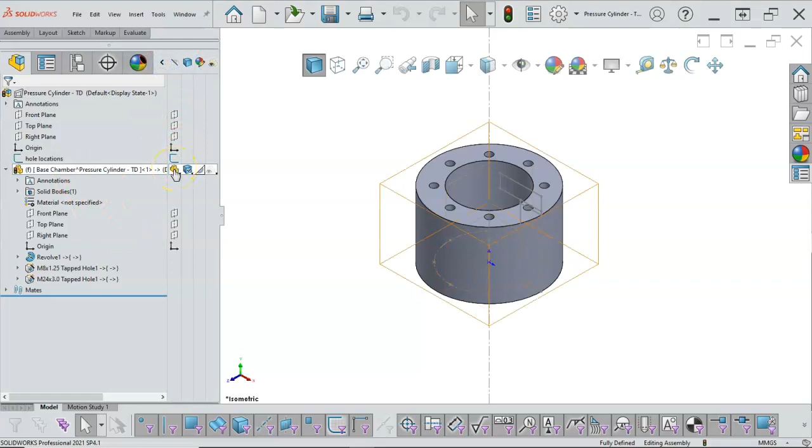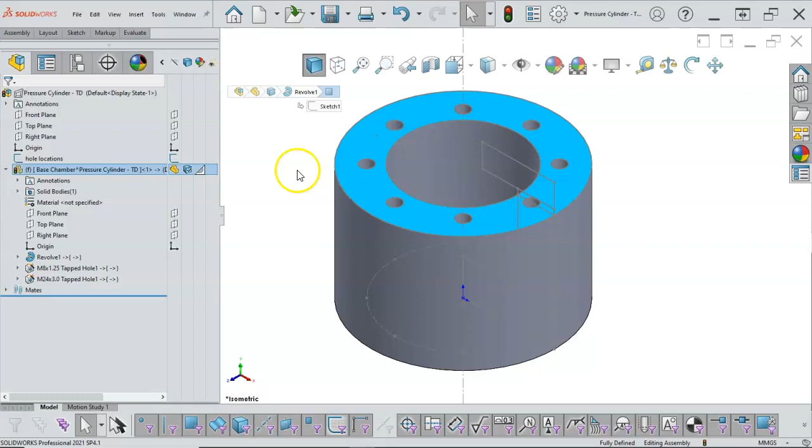I think I'll stay with the revolves. If we wanted to, we could offset a plane. I'll put out the warning that we could open up a sketch on this face and extrude up, but now we're tying the gasket to the base chamber. So if something changes on the base chamber or it gets deleted, we're a lot more prone to error than if we tie it directly to the single point of failure, the layout sketch, or our envelope sketch if we'd created one of those. So in managing the geometry, let's go ahead and collapse that back out.

Let's see what we can find, see if there's another way to get into that new component. If I go to the S key, we're going to do a new part. We could insert a new subassembly, but that gets a little complicated. I'm not real fond of doing a new assembly within the assembly. There are times where I find that this assembly really could use a couple of subassemblies, and then I would create the subassemblies and drag parts in. That also has issues with the mate reference, so you have to be careful with all of the things going on because it can get pretty sketchy pretty quick.

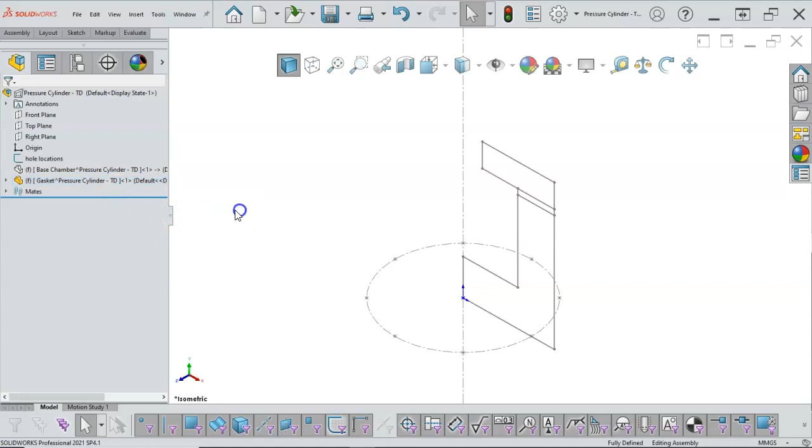I create the new part. We go ahead and escape, or I just click out into space. If we were to pick the front plane, for instance, it would automatically go in and be editing that part. I kind of like to do the rename and perform that little function before I get into the part.

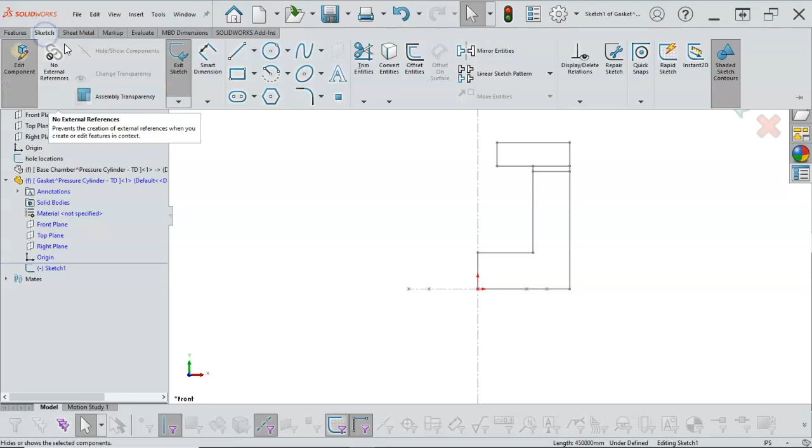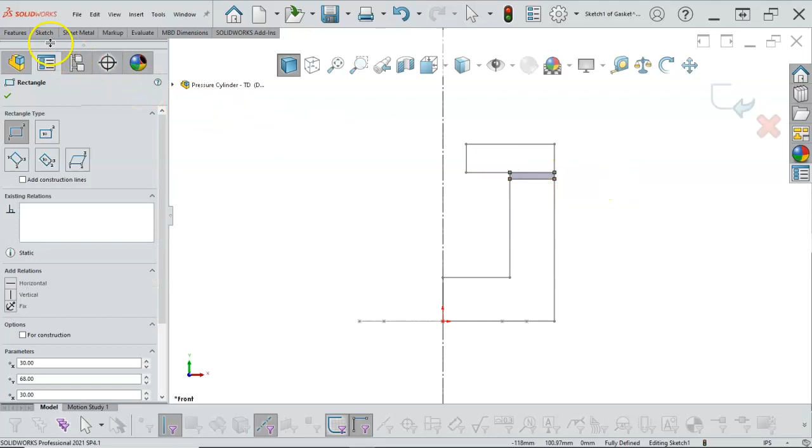So when I edit that part, we're going to again be sketching on the front plane. This time I will highlight the part. Last time we did the convert from the S key, so this time we'll go up to the command manager. Since that comes in as an object line, we'll switch it over to the construction line or center line. Pull the rectangle, go from corner to corner, and right into features to revolve, 360 degrees on the revolve.

One of the things is, as you get into this, if you look over and you don't see the blue, and you see that you're in a sketch at the assembly level, that becomes a little more complicated. So future sketches are going to appear lower because we start entering the features. There's not really a mechanism to put them back at the top if that's what we need.

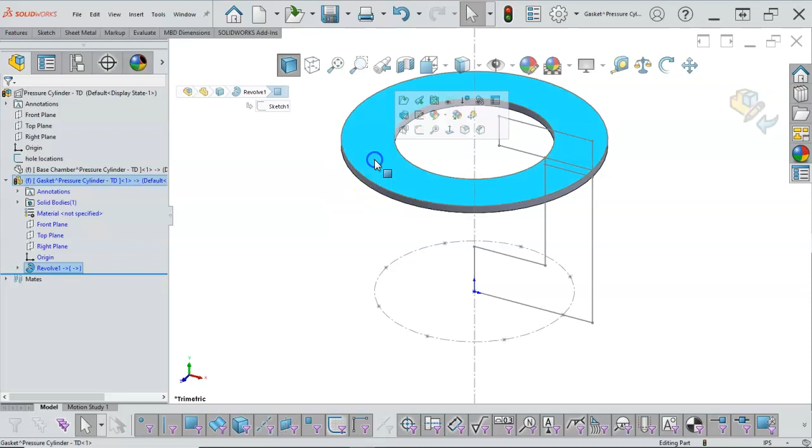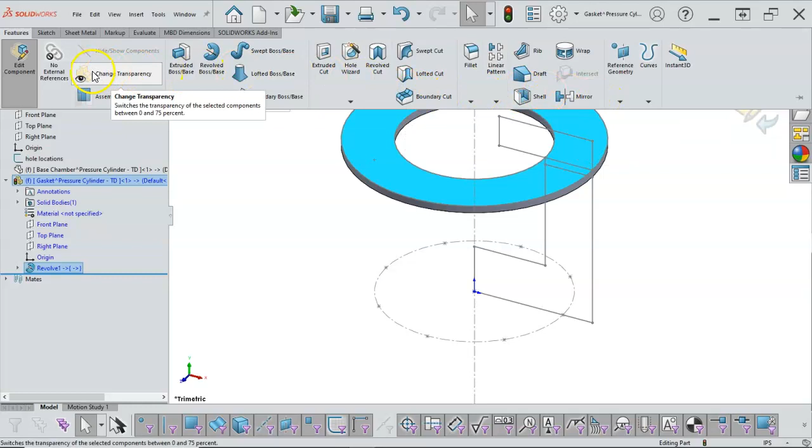All right, so in our sketch, let's go with the hole wizard. On this part, I am trying to go back to the command manager, so I don't... Now that I'm in the habit of doing the S key, I don't just do the S key. So we're looking for the hole wizard, and with the edit component, being inside of the assembly, everything shifted over a little bit, so I'm having to look for it.

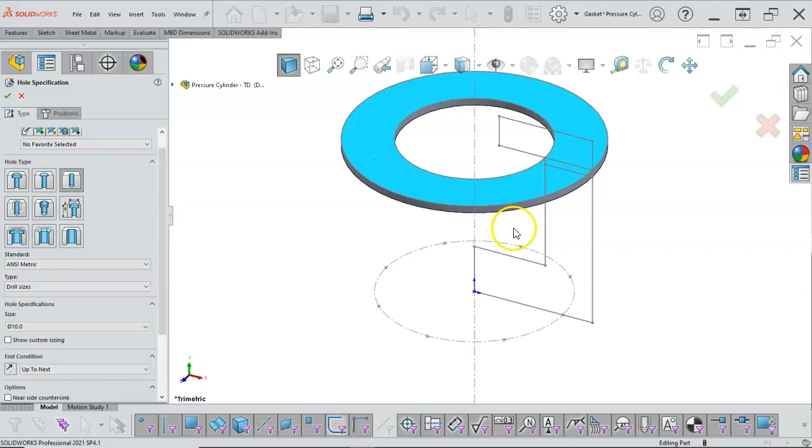All right, so this will be simple. I do not want the dowel holes, I would like to have just the drill sizes. Dowel holes give a little more tolerance for the geometry to be a press fit, a clearance fit for the pin. Since we're placing hex head screws in this, this one also came up inch pound second. So I'm going to have to look at my default files, and since I didn't do it on the other one, it's really not critical, because the millimeters is just confusing me a little bit. The millimeters are coming out of the assembly, and the size is showing up correct.

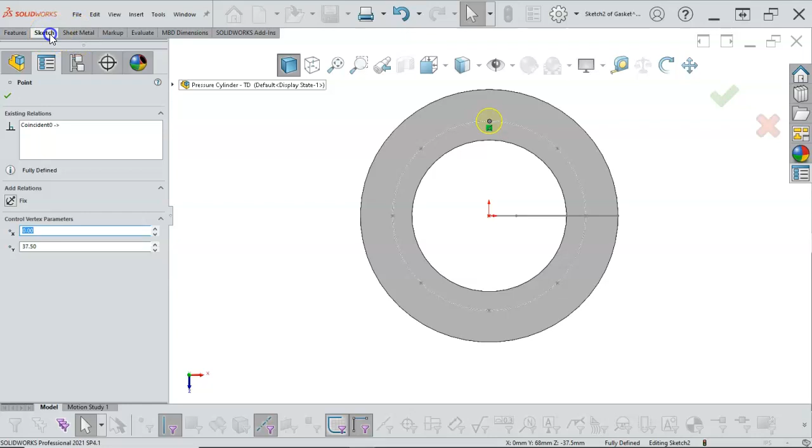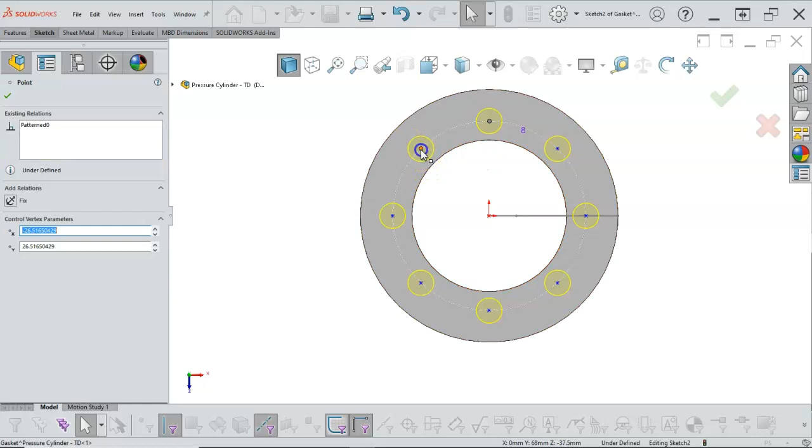So we did the sketch pattern previously, we'll go ahead and generate another one real quick. So the linear sketch pattern, we go to circular sketch pattern, total of 8, and then we go ahead and hit OK. There are times where dimensioning the radius and the angular spacing is nice. I would say tinker with those and pick up strategy, since that's going to a defined point, not really the coincident on the base circle, should define in one.

So there is our gasket, and then I click to exit the editing context, and we can rebuild and save, and we'll tell it to save all. And then this is the warning as we add these components: do you want to save internally? Eventually I'll get tired of seeing this and I'll say do not show again, because I'm in that process, and I will save externally when I am ready to.

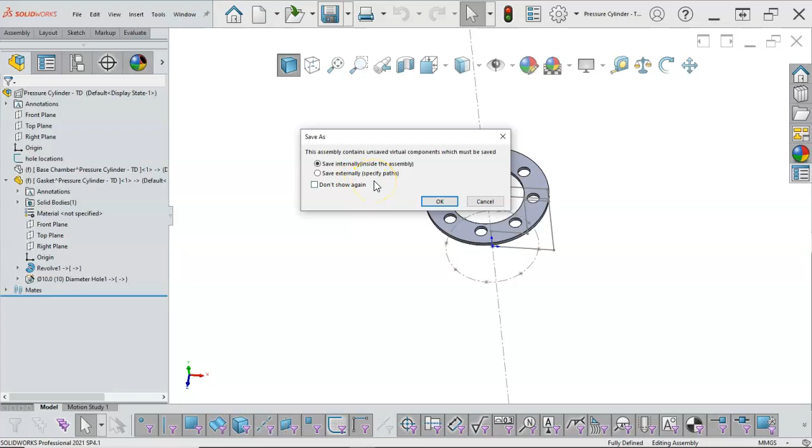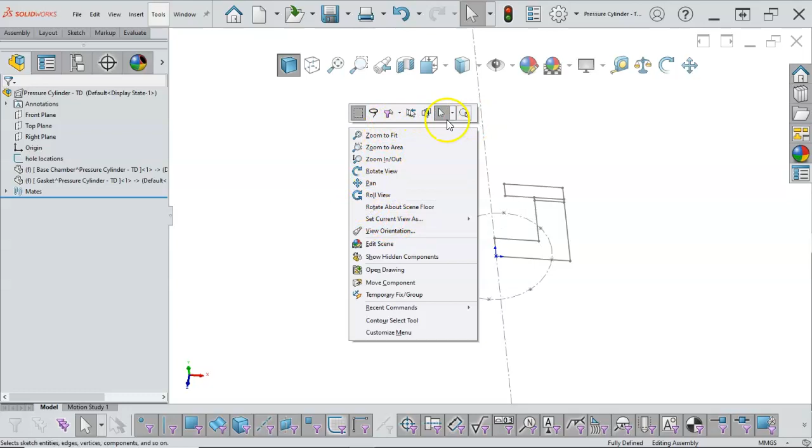So if we right click and we hide the virtual component, then we can move on to the last one. So let's see, we did the S key, we've been doing the insert. I don't think there's anything on the task pane. Let's see if we right click. Yeah, don't really have any tools, so we'll stay with the S key or insert component. Let's check the assembly pull down. There we go, new part.

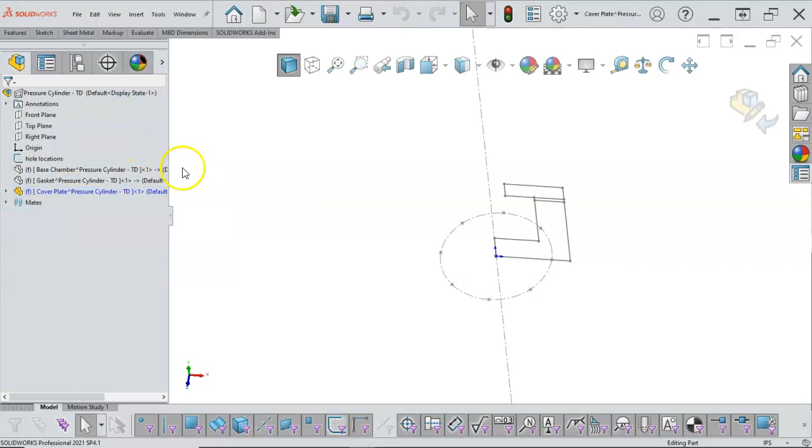And again, escape or click. And this is going to be the chamber cap cover plate. Realistically, you can call these whatever you want. All right, so the cover plate, we edit the part, we go into the front plane, open up the sketch, we'll go back into our rectangle, draw the body.

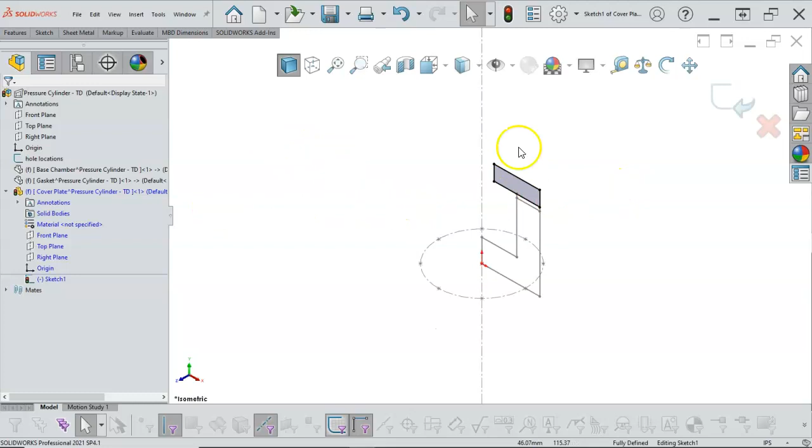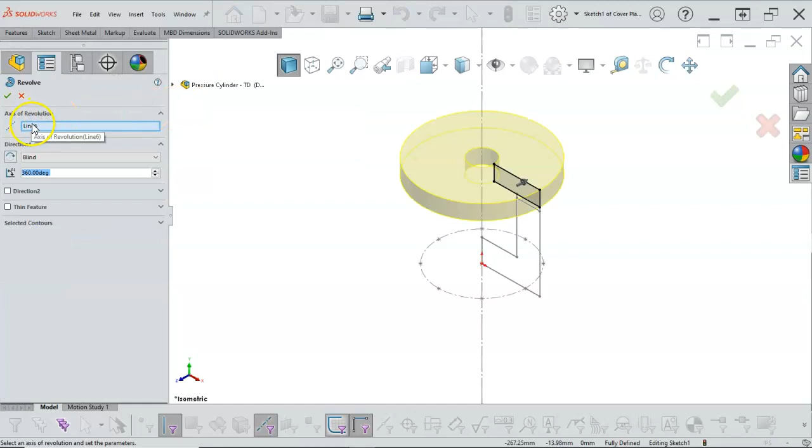We need something to revolve around, so we need to pick that. I think it picked anyway. We'll go back into the convert, make sure that it is a center line—we don't want it to participate. It might not bother, but it'll find the center lines where the object line we would have to select.

This time I generated the hole first with the model, so we're not going to do the hole wizard. Actually I wanted the hole locations to show, so we'll right click and hide the layout.

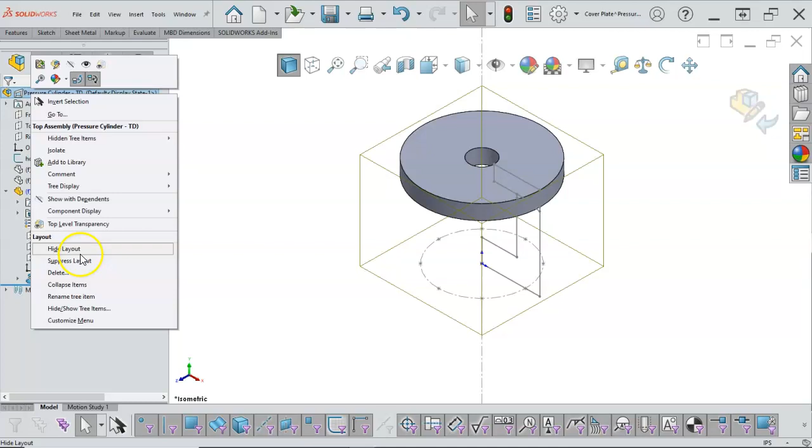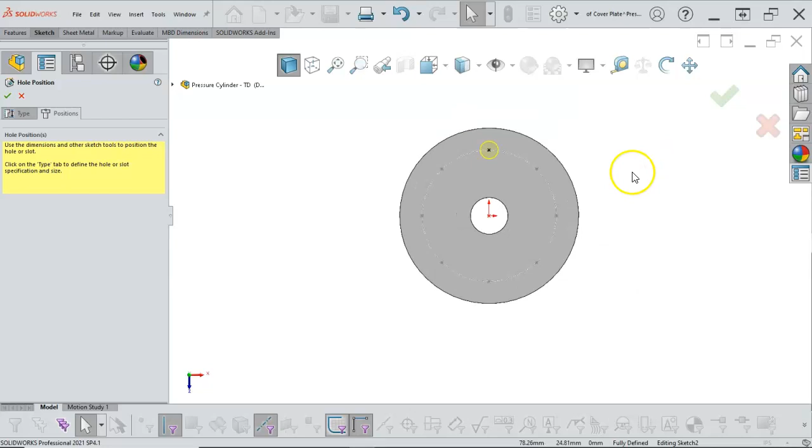For our feature, let's go into the S key this time for the hole wizard. We're still at 10 millimeters up to next, and I can do the position. This is pretty much a review of what we did in the multi-body, just to give you options.

There are times where it's nice to have it in the sketch, and other times where you get enough holes in the pattern that it's easier to make this a sketch-driven pattern. So if we go back to the features, under linear pattern, we'll find a circular pattern for the geometry.

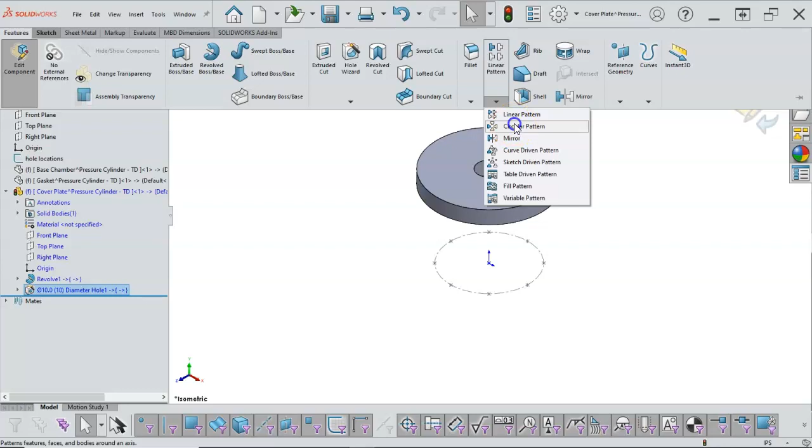Actually, that's what I should have done on the gasket, so let's just compare those two. For the circular pattern and direction, if we don't have something convenient like a cylinder, we can go up to the view and turn on temporary axes.

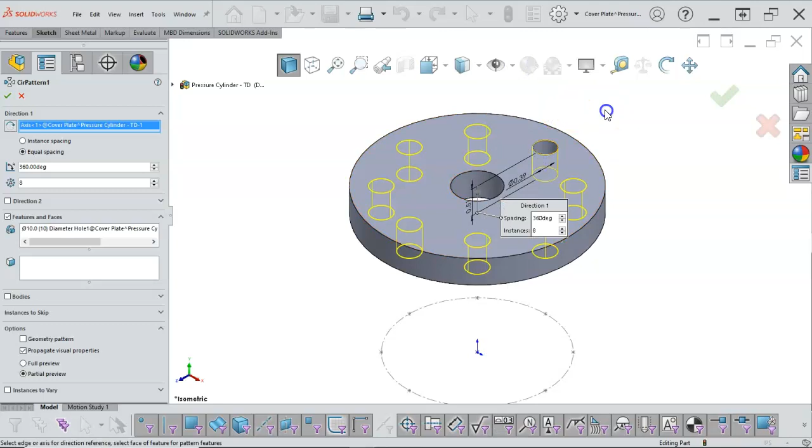I think last time we picked the cylinder. I can pick a temporary axis the same way, and then go back and turn it off, and that will work fine. If I suppress that out...

Pretty much the circular pattern is going to have the sketch pattern we did defined by the 8, where we're trying to make this point back to the hole locations, and this is related to the point.

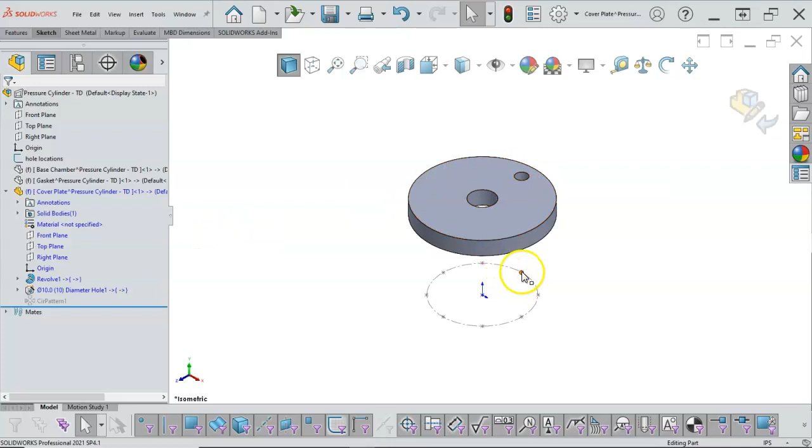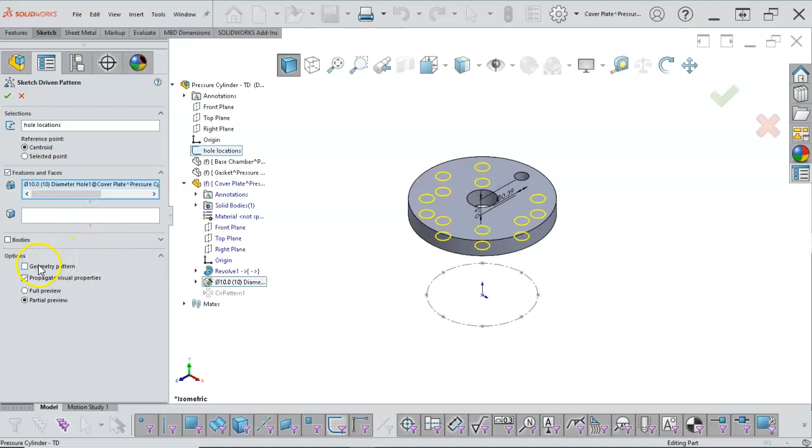So I pick the feature again as a pre-select, go into the sketch-driven pattern, and then the selection will expand out the flyout, and I should be able to find the hole locations. It generates the geometry, and occasionally it will have some issues where it'll recommend turning on the geometry pattern. We can try that—it's just a matter of how much it tries to solve or refine those geometries.

Now we need the cosmetic thread. We can go to insert annotations, and Cosmetic Thread. This is what the hole wizard is doing for us automatically. It finds that we are at 24 by 3, and we'll do the up to next condition.

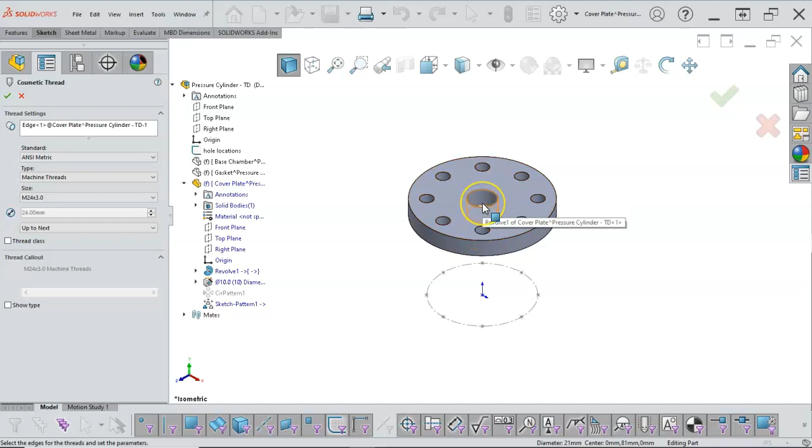So I'm still clicking on the outside going in. If something happened that I wanted to switch this over to a tapered or a different size, then we would have to go adjust this Cosmetic Thread manually, whereas the hole wizard would perform it automatically.

And then I decided I didn't really want to see the machine threads, so we'll uncheck the show type and go ahead and generate our geometry.

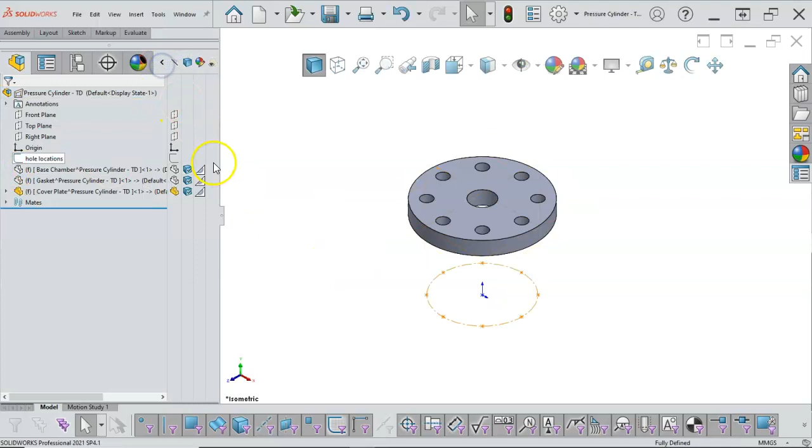All right, so up to this point, let's go ahead and hide the hole locations, and we'll expand out, and I can manage those geometries. Interesting, kind of got a video blip with the base.

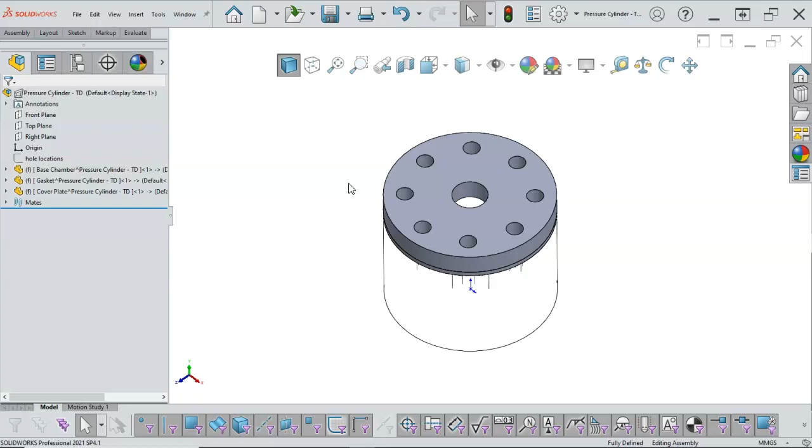At this point, we could go ahead and generate the toolbox and bring in the fasteners. I'm going to bypass that this time and go straight to the exploded view.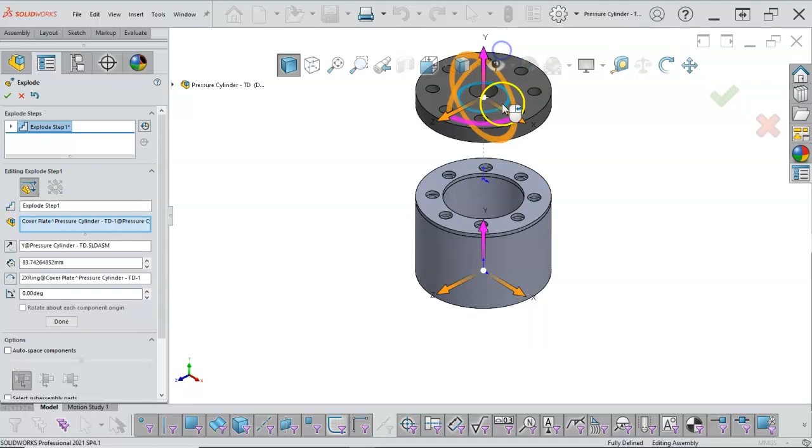So new exploded view, and I'll bring up the first part. Since we're in the assembly, this should go back to millimeters. We'll bring out the second one, and then of course if we had the hex bolts or washers or anything in there, we'd be able to perform that first.

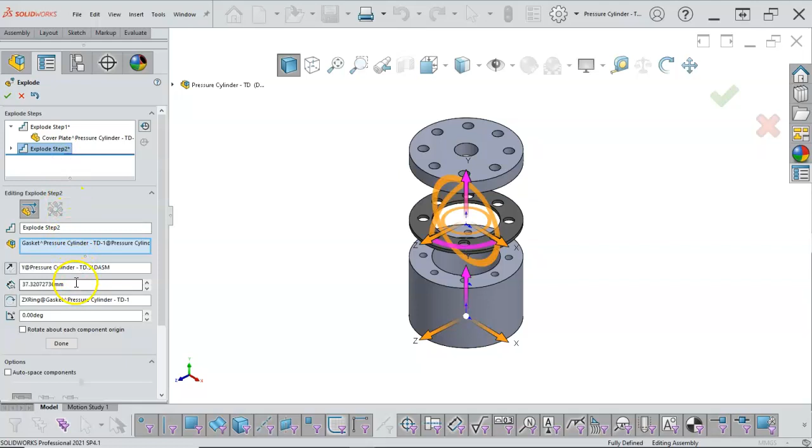So let's go 100 millimeters and make sure to hit done to apply it, and then maybe 40 millimeters looks pretty good, and apply it. So this geometry is applied directly in the assembly.

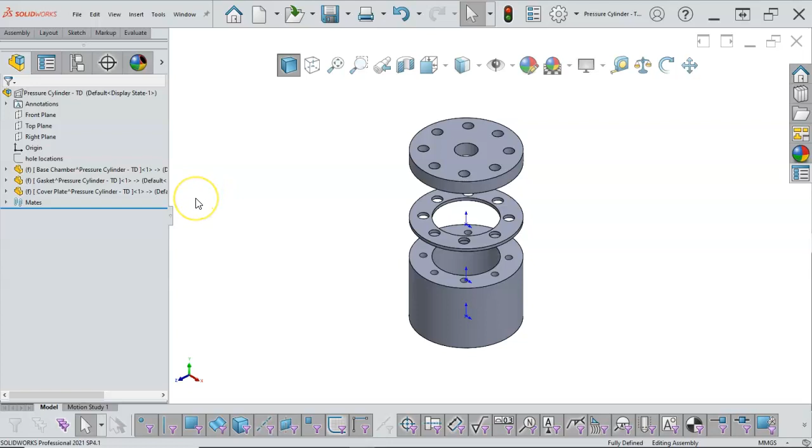All the parts are internal to the components, and the main thing is kind of like the multi-body. I could leave it at this stage and wouldn't really have to do anything else to this geometry if it was a single piece that we're trying to work with.

So let's collapse it, and we'll go back and just double click to make sure it gets saved. Save all, save internally, and I'd be interested in seeing how this reacts with the drawing.

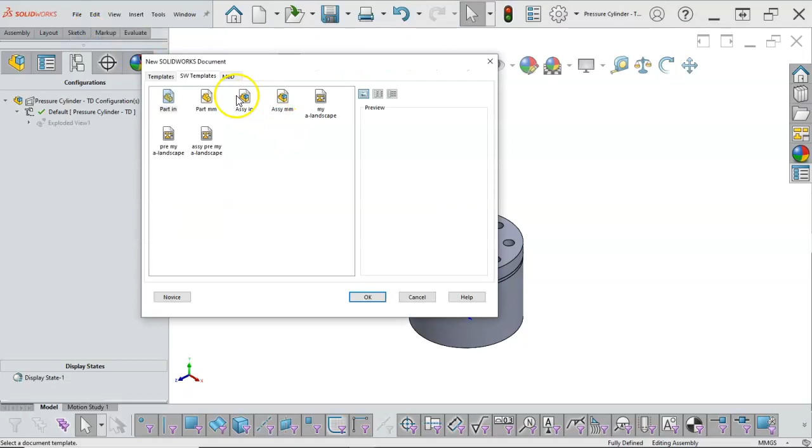So we'll do the new drawing, and I'll stay with my landscape, and we're looking for the open geometry. So there is my pressure cylinder top down. Let it update, and our first sheet we can do the exploded view.

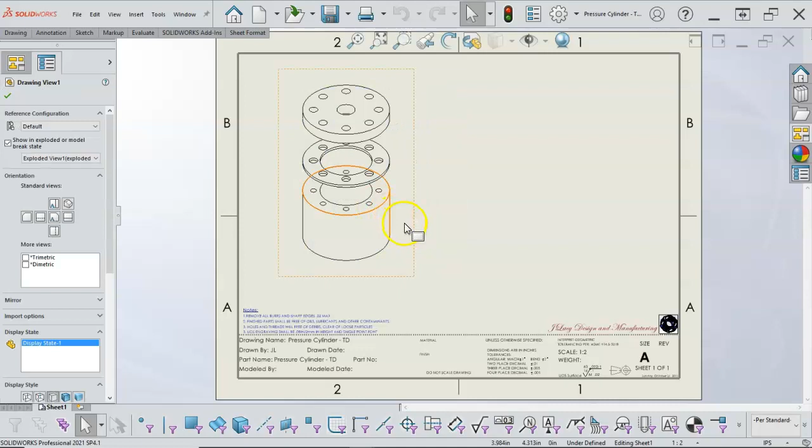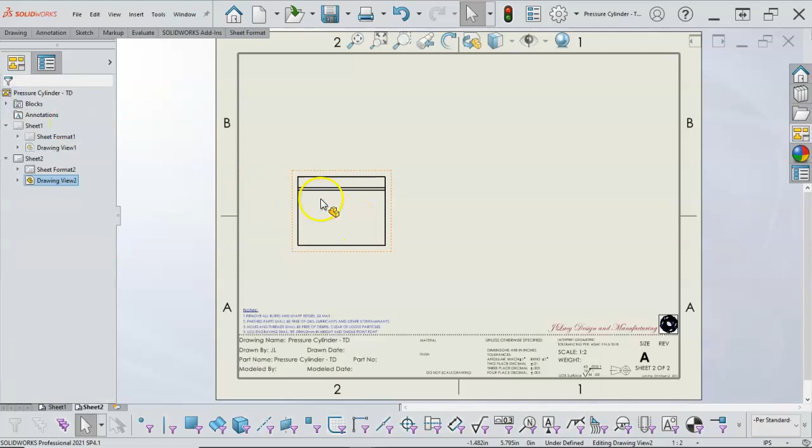If we expand that out, we would need to do something similar, and this is where the virtual component and the multi-body differ. If I bring that in on the front view, I'm still working out of the assembly, so my naming convention and some of the other things become a little bit more complex. I don't know that this lends itself in the same way to having those individuals.

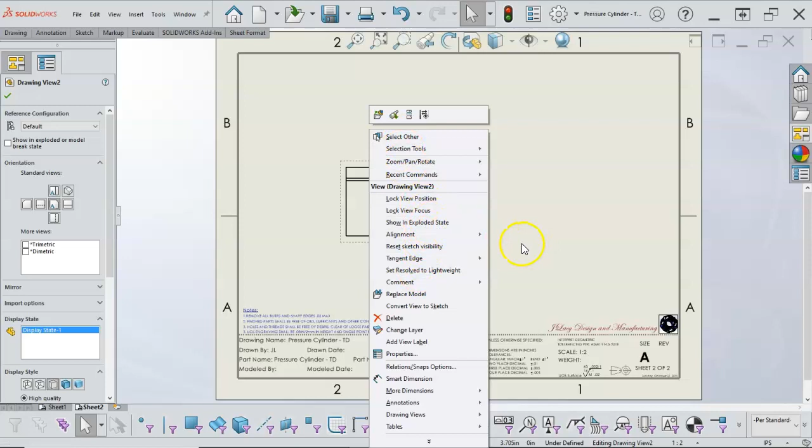I would have to maybe create configurations or hide, suppress those files out. That doesn't give me the same kind of functionality. So let's see if there's anything on the right mouse button real quick. Didn't realize there was a show exploded state available, but I'm really not seeing it.

We'll go ahead and delete that view. Since it's tied to the assembly, I can switch back to the cylinder, and up to this point I can rename these anything that I want. So if I wanted to call these top down, I'll do that for two of them, and then we'll take a look at the gasket.

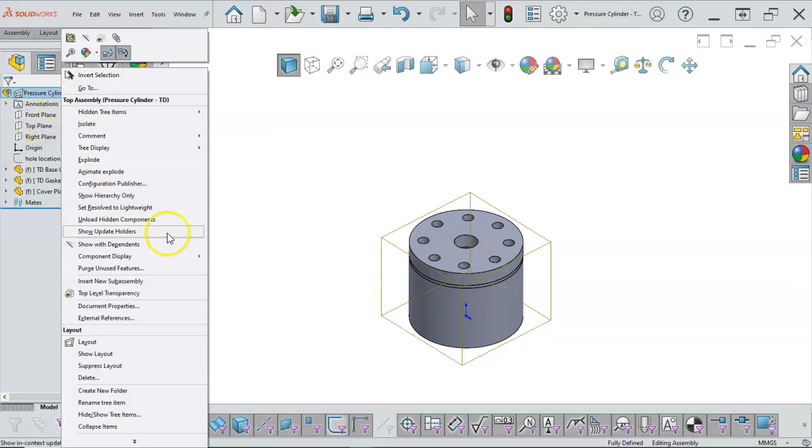Up to this point, it's relatively easy to rename. If we go back, when we do the rename out of the File Explorer, it's going to have to tie back to the assembly. So, external references—go back and we're just going to select all of those so that it can output.

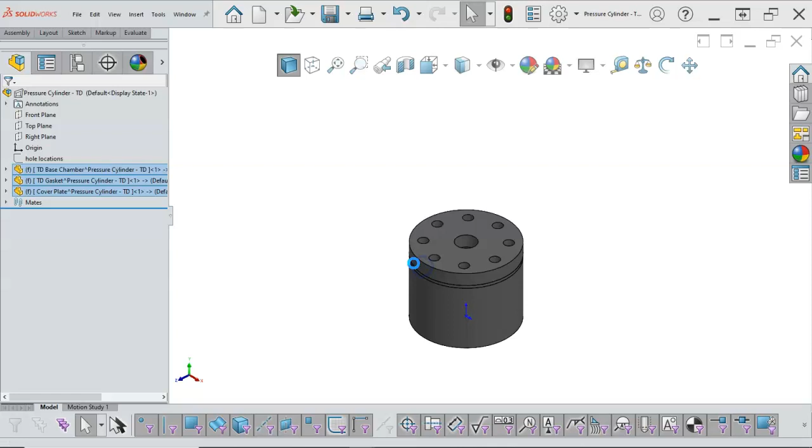We're going to save the part in an external file. Good idea, I'm just going to put it the same as the assembly, and we'll hit OK. I can't rename this while it's open—notice that the brackets went away. I can't rename the cover plate while it's open, so we're going to save one more time.

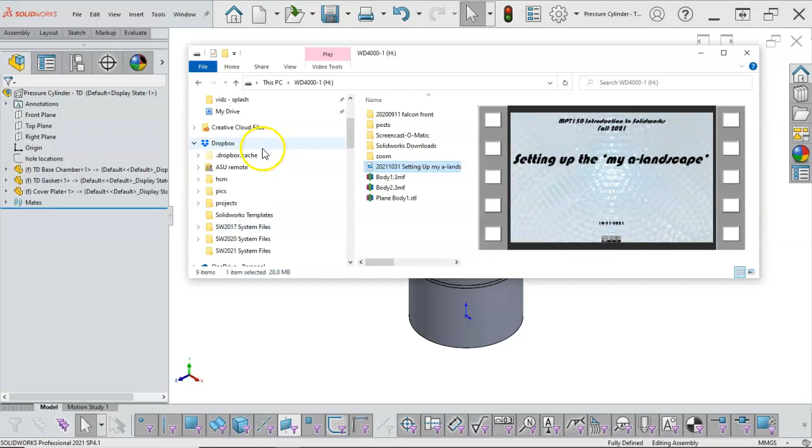Nothing really changed. It didn't do it like the save bodies—it didn't output it, it just put it in the folder that we're working with. Oh, my splash screen came up.

We'll try it, let's just see what we can do with the rename. I don't just want to click and do the Windows rename—I want to go into SolidWorks and rename so that it finds the associated drawing, that connection back to the top-down assembly. Then if we're calling this the top-down cover plate, I can hit OK.

If there were still virtual components and I was renaming the assembly itself or doing something higher level, I could include virtual components and make sure those are part of the selection set. All right, so it didn't carry it over into memory. Not new—I want to open recent.

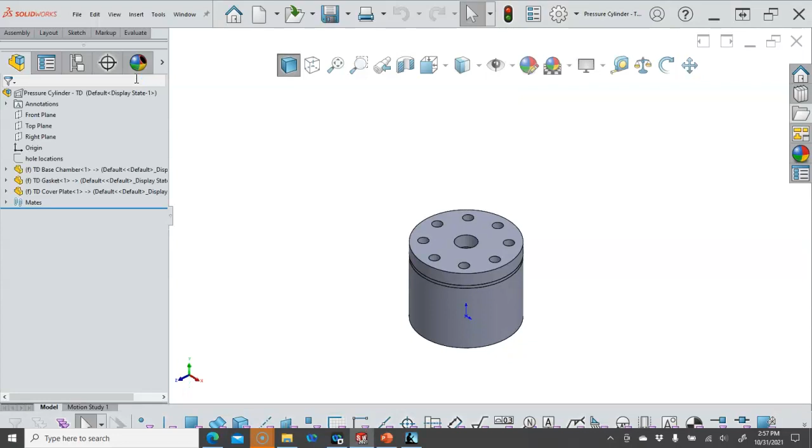So we'll open that back up and we'll verify. Worst case, if it didn't make the connection to the cover plate, I have to pick its name, its location, and reassociate it to the geometry. Most of the time, that's going to work.

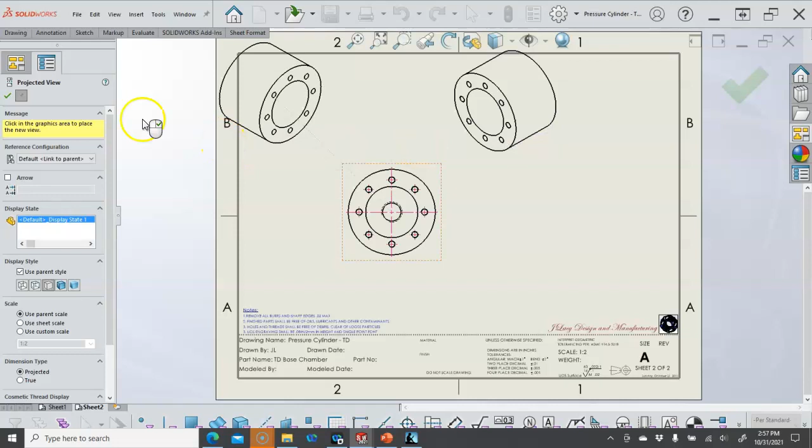All right, and then our first pass on the drawing. Go back into the view palette—now I have access to those individual components. We'll grab the base chamber, let's go ahead and bring in the top view, bring off an isometric view, and then under the drawings we'll go into the section view.

Again, there are arcs, single offsets, notch offsets, depending on what we're trying to present. Most of our sections are just going to be, I want to see what's inside. And then we'll set up for the gasket.

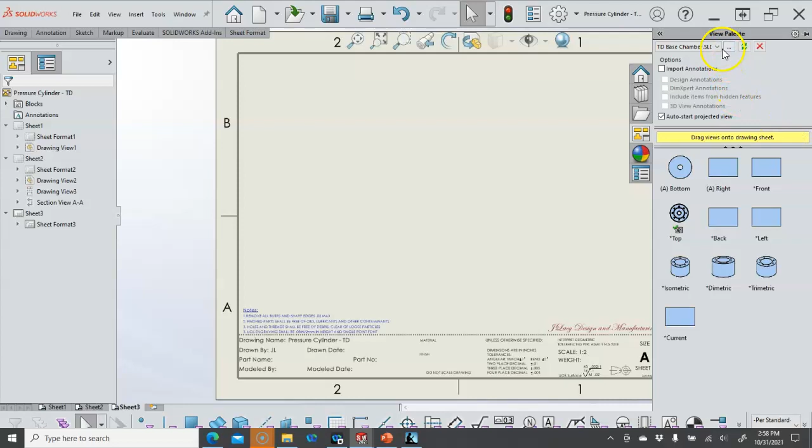So I've been using the view palette quite a bit. The gasket comes in as the top view. The projected view will bring it off to the side, over for the isometric, and reposition it. We'll add another sheet.

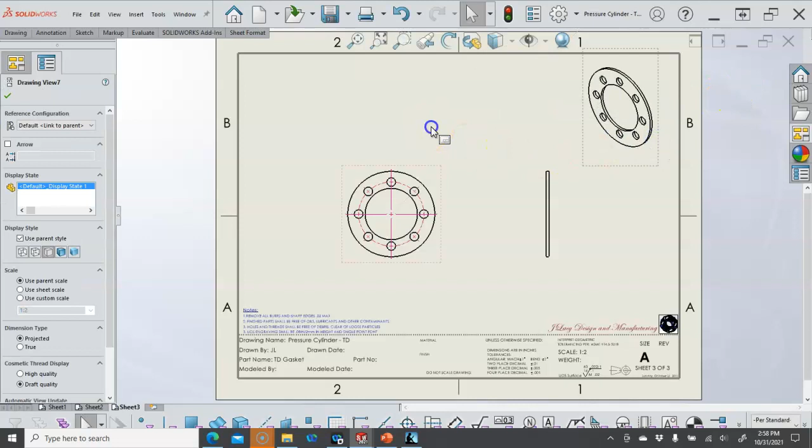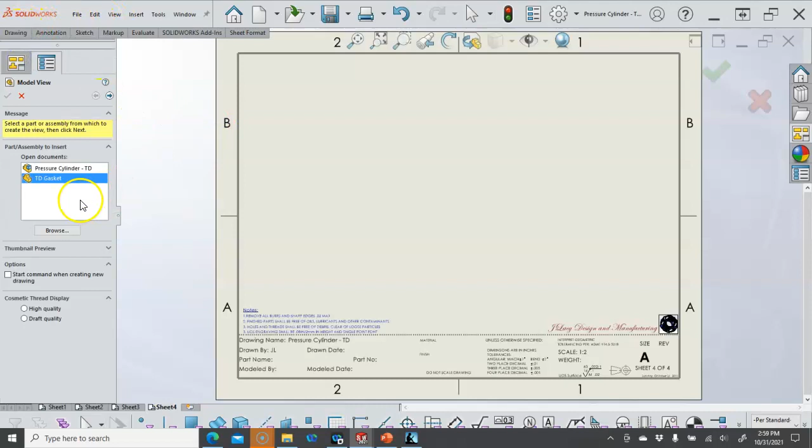Or in the case of doing one part file per sheet, we would just open up the next sheet and insert. So let's see the drawing, the model view—going the other way, we'll browse to the cover plate.

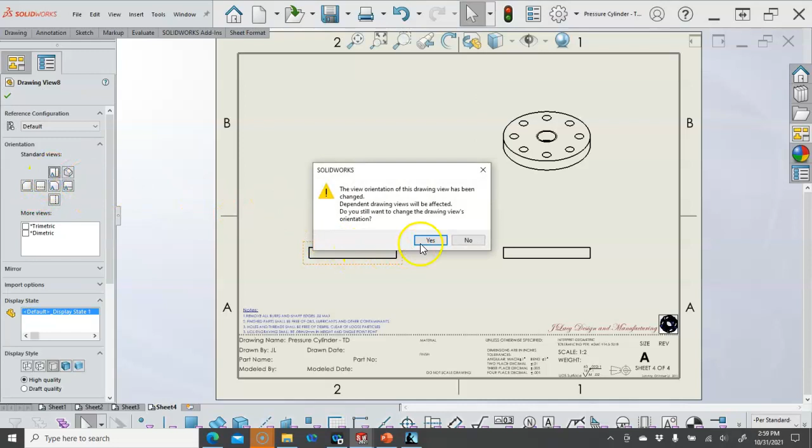The advantage of the model view is it brings in several views at a time—you don't really have to do the projections. We want to go to the top. It's always going to warn us that if you've applied any dimensions, you're about to lose them. The isometric didn't update, but that's fine.

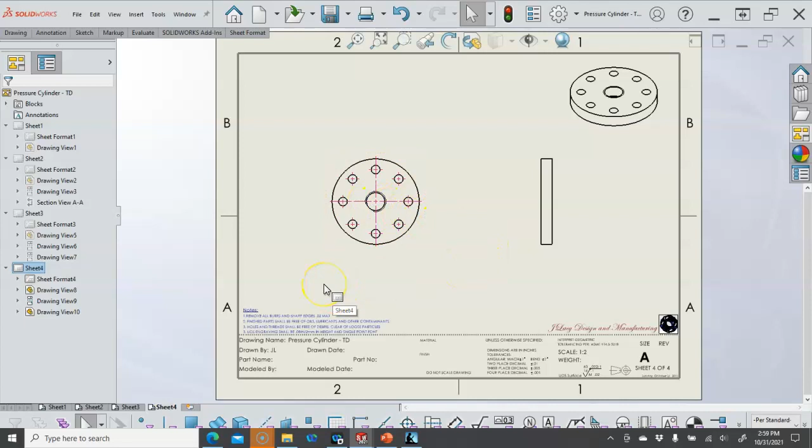And there we have our first pass ready to go through—apply dimensions, verify that the layers and the other properties worked okay, and we have our geometry.